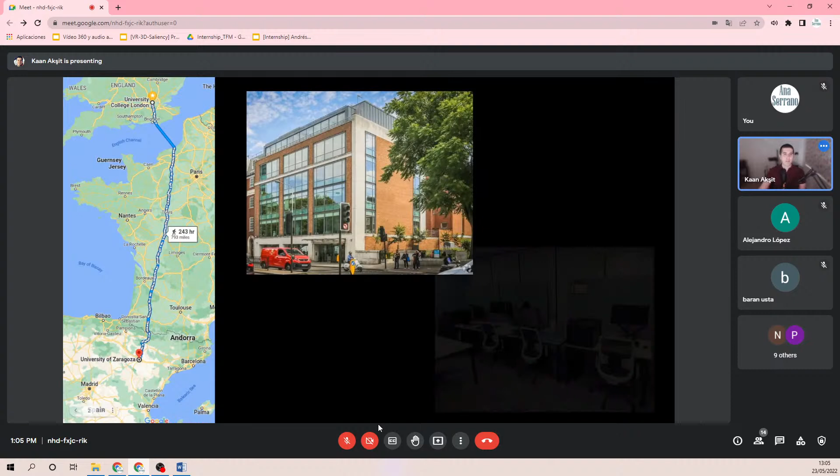As you arrive in London, one of the main train stations, Euston train station in London, you will immediately find our building. It's right across the street. It's a beautiful building located in the center of London. In this building, you'll find lots of offices and various different laboratories. Both my office and my laboratory are located in the very same building. Here you see a photograph taken some time ago showing benches from my laboratory. We are equipped to conduct research in various different branches, including optics, graphics, and visual perception.

Next, I would like to give you some idea about where I come from, what I do, what's my intention, what's my lab's motivation, and so on. Here I show a timeline. I joined University College London back in 2021, a year ago, in the computer science department as an associate professor. I started my own research group, Computational Light Laboratory.

Previously, I was a senior research scientist at NVIDIA in the United States, where I helped co-found a research group dedicated to virtual and augmented reality applications. After spending years in the industry, I moved back to academia with one goal in mind: to help shape young minds and get their attention to tackling a critical problem, the future of displays. In a second, I will talk about why displays are so important, why we should care about displays in the first place, and why its research is highly important for our societies.

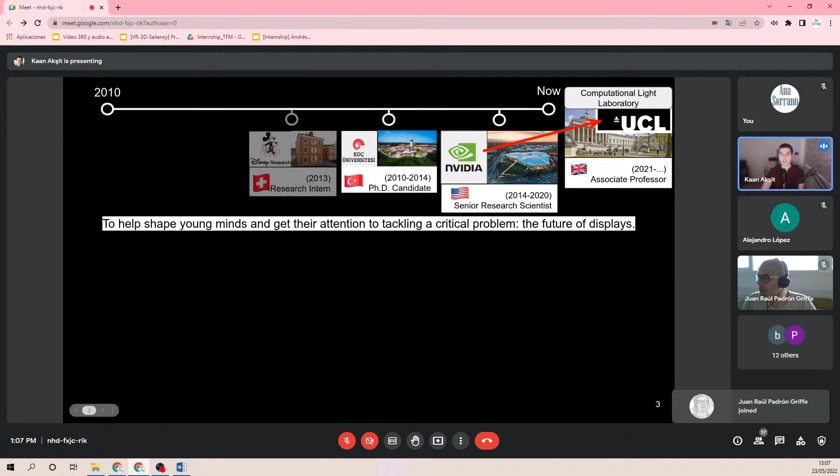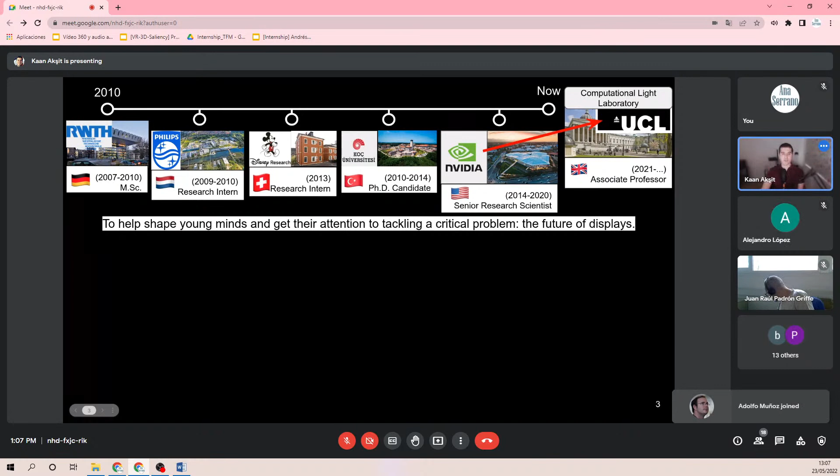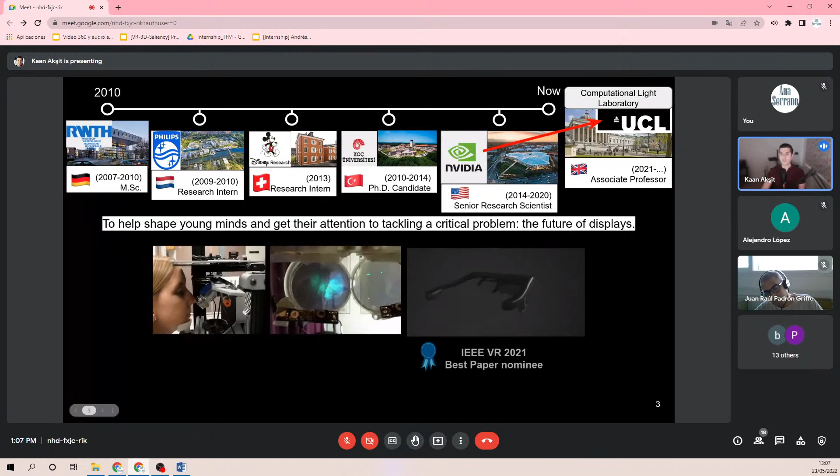But before coming to that, I would like to highlight that I've been in other places in the past. These institutions include Koç University in Turkey, Disney Research in Switzerland, Philips Research in the Netherlands, and RWTH Aachen University in Germany. So people know me primarily for my contributions in augmented reality displays, near-eye displays, and 3D displays. Many of these works, as Ana told, already received multiple awards.

Next, I want to bring you a slide discussing more about our most noticeable research from recent years. A quick summary goes as follows. On the left-hand side, you see a film being placed in front of a mobile phone and converting that mobile phone into a near-eye light field display. We made such a prototype back in 2015, and we showed that you can convert a mobile phone this way into a display just using a very thin sheet of film.

In 2017, much before the leading industries, we looked into a more advanced version of that light field approach by taking into account perception. We looked into the idea of varifocal displays. Assume you know where the person is looking at in a given scene. You can change the focus of the display to a specific location in the scene, so that you present the right focus cues in a display. This is computationally less expensive, and that's why it's interesting, because it simplifies your hardware quite a lot. Although in these implementations they have bulky form factors, it could also be shrunk down. There is evidence for these things, which you can find coming out of industry research labs in recent years.

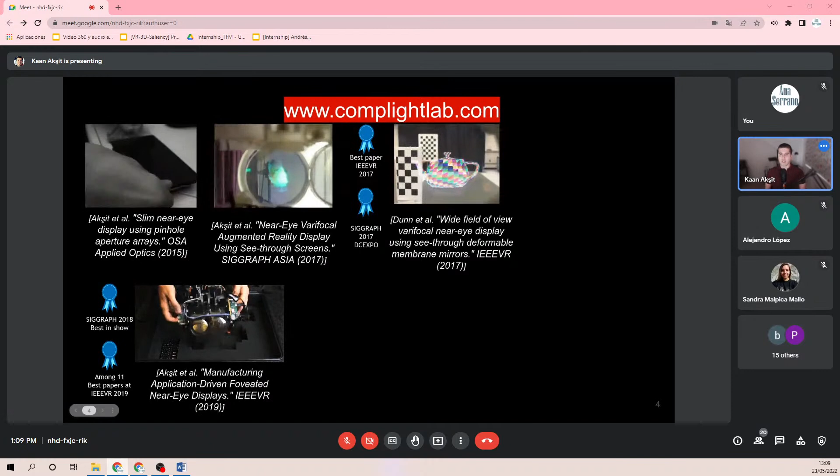In 2019, we looked into the trend of 3D fabrication and 3D printers. We asked ourselves, can we make this so easy that you can just 3D print your display using your own 3D printer? This was the basic idea, because 3D printers promise an approach of updating everything on the fly. All you need is the raw material and the 3D printer. We showed that most components in a near-eye display could be 3D printed, so you can make a very cheap and highly effective near-eye display using 3D printers that supports your application.

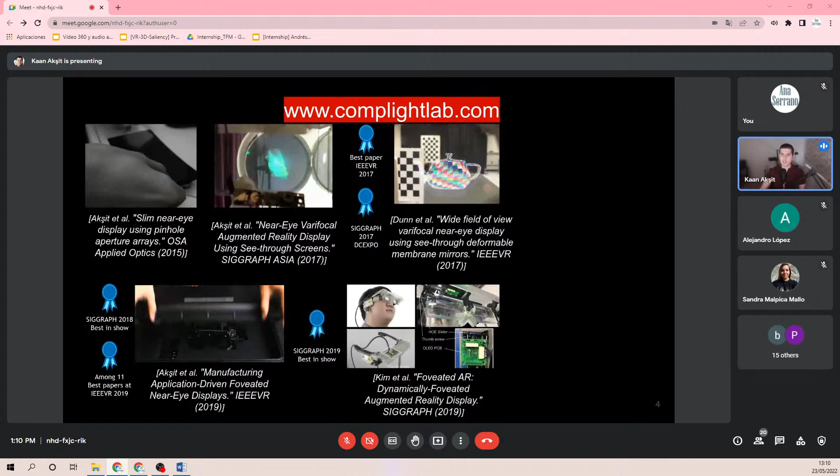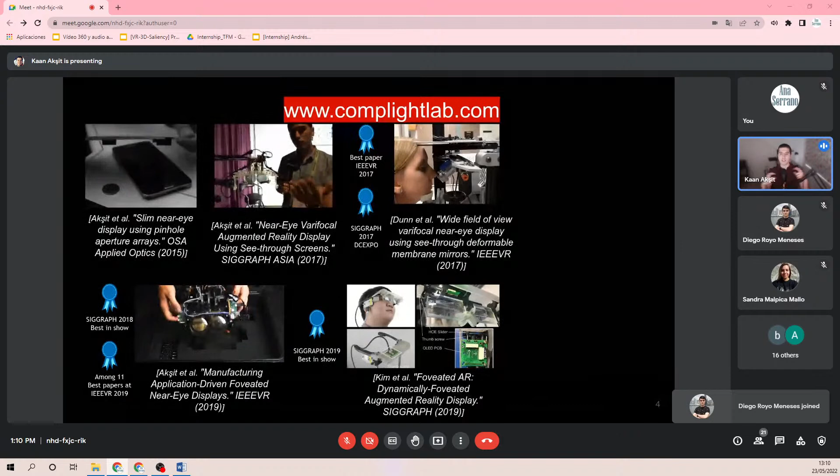Back in the 2018-2020 timeframe, we looked into foveated displays. The idea is, if I know where you're looking, I need to provide a high-resolution image at that location. However, in your peripheral vision, at large eccentricities, you don't perceive most of the details of the content. So can I use a lesser amount of pixels in your periphery? This is the basic idea behind foveated displays, and we actually built something similar: a picture-in-picture display with a high-resolution image at your gaze location, and a low-resolution image expanding to a wider field of view.

So today I want to focus on the future of display technology. This is the main motivation of my lab and a primary focus in my research group. The reason for that is quite obvious, but I just want to reiterate it.

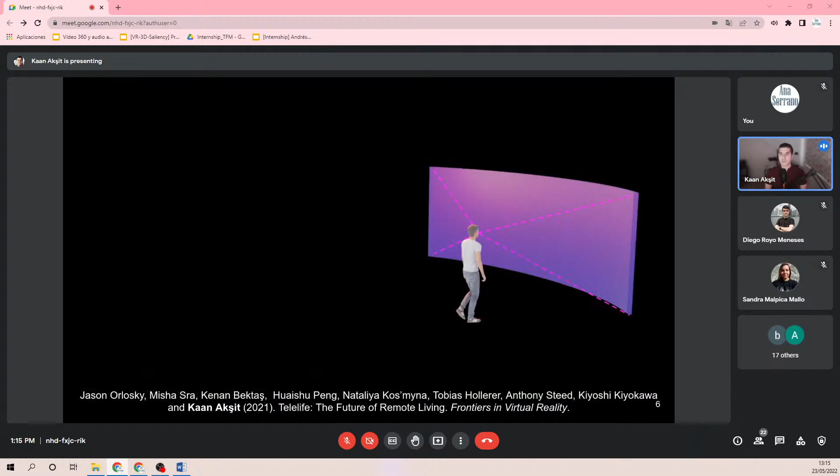Of course, this is subject to discussion - this is my personal view about how the future should look like. But I think many industries share a common goal. In my opinion, the primary goal of industry and academia is to build a display that paints lifelike three-dimensional visuals right in front of our visual field of view.

And these displays will be mobile, forgettable, let's say. You won't even feel it - it's like your smartwatch. You don't feel it all the time, but it's on your arm. You can forget about it. It will be similar to that in terms of experience.

And these future displays will help us transform the social interactions I was pitching earlier, help us get together again and remove us from flat teleconferences. And of course, it will provide unseen opportunities in education and entertainment, because now you can introduce three-dimensional visualizations in the proper, natural way, and blend it with the real world. That's also an important aspect of augmented reality.

Also, it can transform businesses and healthcare applications quite a lot in the future. But as you can see from this depiction, the person is standing up, not sitting down, not in front of a table, and not looking at a two-dimensional flat display. This is the future that I hope to get to, and it's more human-oriented.

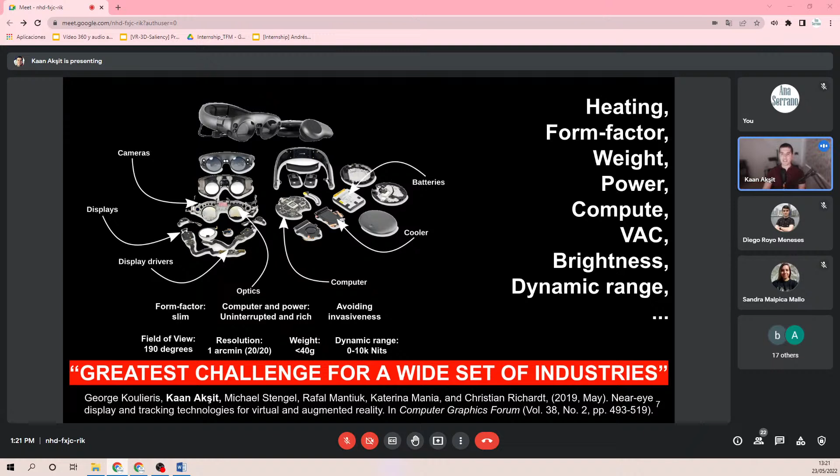We can either follow this route, continue pushing it and try to miniaturize display drivers, batteries, and computers while building a new operating system and finding a new camera and display and so on. Or we can change our thinking, change it in a different way. But how do we change our thinking in this? How do we get to a new form of design from here?

I asked the same question to myself some time ago, and I looked into augmented reality display devices. I analyzed them and tried to see what people tried in the past before. People tried near-eye displays, handheld displays, retinal displays. There are even contact lens displays you can find. There are projector-based spatial transparent screens, projecting on walls, and all these kinds of displays you can find. To my surprise, there is one thing that people didn't try.

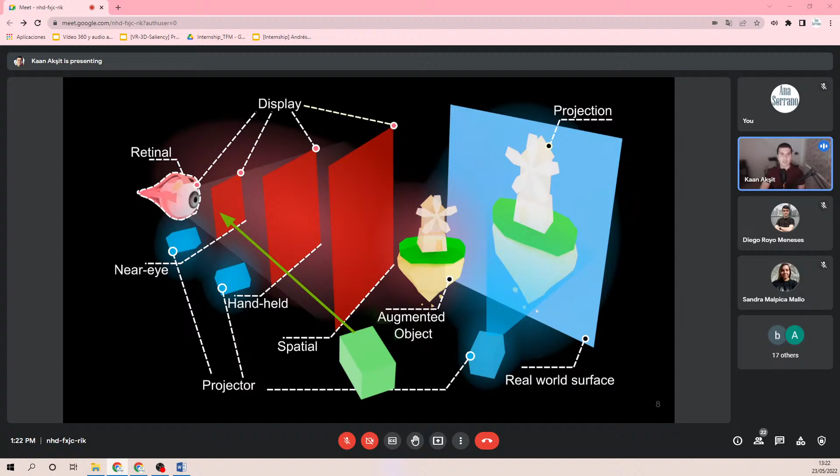That is to project images to a user from a distance without requiring a screen. It can either require an eyepiece, or it can be a direct beaming into the eye. So I will be talking about this idea mainly in this talk, and I'll combine it with computer-generated holography in the coming slides.

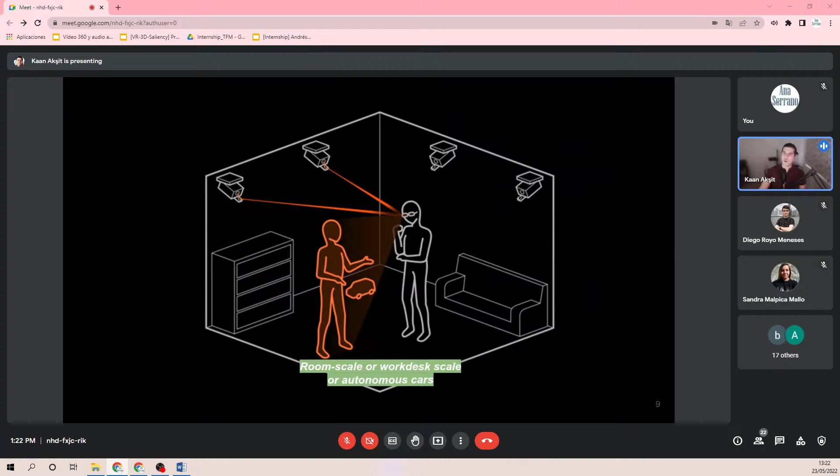So let's understand what I'm proposing here. If we take everything off that device, off that near-eye display - I'm talking about computing modules, light modulators, and batteries, all these devices - let's say we remove all of these from the near-eye displays. Instead, we pack it into projectors that you can distribute around. It can be in any form factor, you don't care, because you're not attaching these projectors to your head anymore.

And then we beam optical beams to a user from a distance, creating this augmentation overlaid on the visual field of view. Of course, in this scenario, a user has to wear some sort of optical component, and at best, these components can be diffractive components that are fairly thin, can be in micrometers thin scale.

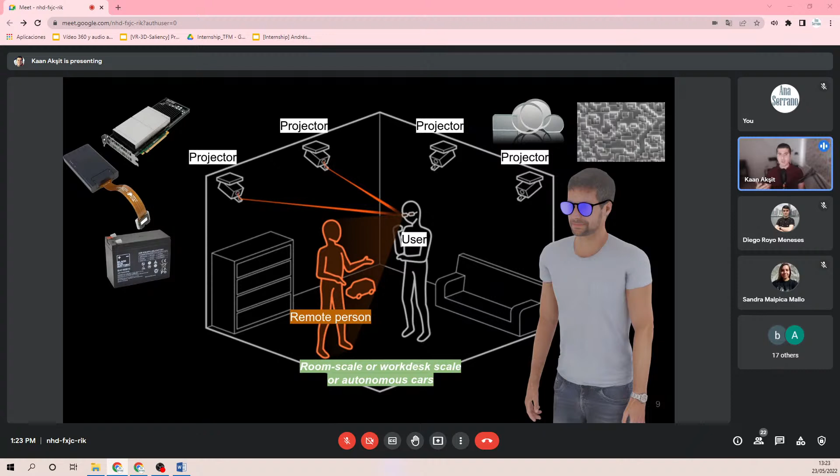So basically, you can create glasses that are lightweight, even more lightweight than your prescription glasses, because they're just made out of diffractive components. This way, I think we can avoid many different problems, like we don't have to think about heat dissipation, or form factor, because all I'm using is a diffractive component in front of my eye, and the weight is like there's no weight in this. The power and compute can all be on the projector side.

If you like, you can add, I don't know, 2 different computers per projector, as much as you want. So this can help you realize an augmented reality display system that will be free from multiple different problems that we just discussed. About the heating problem specifically, I want to talk about this a little bit more.

If I just take my mobile phone and put it here, let's say, and it's in constant contact, and let's say I'm talking to someone on the phone. After 10 minutes, it can easily get to a temperature like 35 degrees, 40 degrees Celsius. And this is a high temperature. If you look into the medical literature, even this is not healthy.

So just think about the requirements of augmented reality glasses. If I place some sort of computer, even if it's a thin client, people using this streaming approach and so on - even if they stream, they would need some sort of predictive capabilities on those glasses, because the latency will be an issue. People have to predict the missing frames on the thin client and so on.

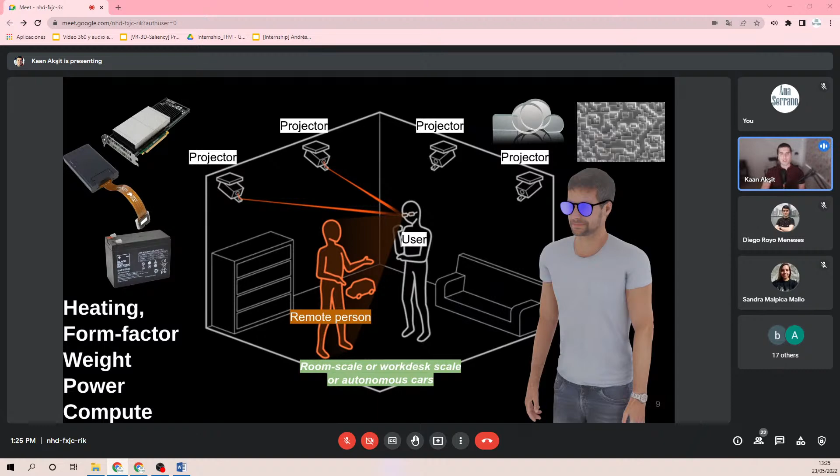I'm not really sure, I'm not fully buying all these other approaches. I'm not against them, it should be explored, somebody has to explore it. But all I'm saying is there's an alternative way to fixing these issues. After designing this thing, we literally go back to the lab and start building stuff.

Back in 2021, we built a display for the first demonstrator for this work. On the left-hand side, you'll see this optical breadboard with a bunch of different components. You see this projector projecting a beam through a bunch of different lenses, and then these lenses project the beam to the steering mirror, which helps you shoot the beam in the right direction towards the user.

On the right-hand side, you see this wearable headset, the first version. There's a mirror, diffusive screen, and a beam combiner. You don't necessarily need that mirror on top, because if you have your projector at the ceiling, it can project from the top and you don't need that mirror anymore. This is just needed because the projector at the time was on a table and the person was close to the projector, so something has to bounce the beam into the display in the correct way. That's why we needed that thing at the time.

If you make all these things happen, there's tracking also involved. This camera, if you look at the left-hand side again on this optical breadboard, you will see this camera. It's coaxial, meaning it's aligned with the axis of beam propagation. You can now see wherever you project the beam, so you can speculate if you're hitting the glasses, or a wall, or something else with your beam. You can shine the beam at the right place, find the person, and display the image this way.

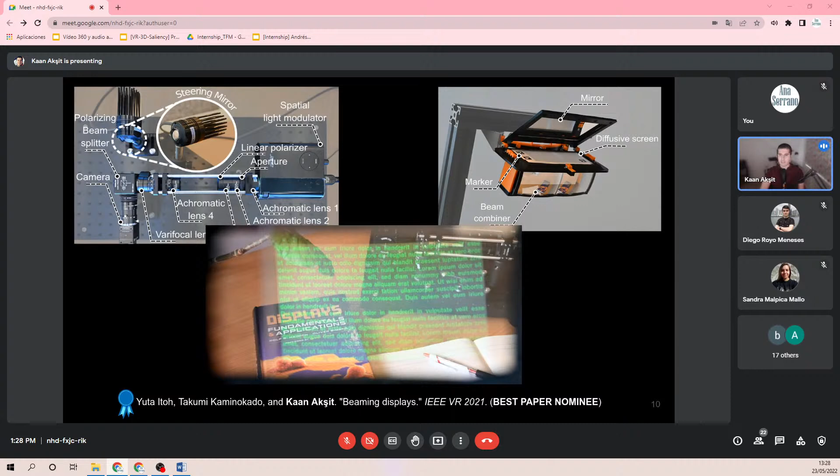I'd like to take a quick segue. Please keep this in your mind, what I just showed you here. I would like to take a quick segue to holography and combine those two things in the next slides.

In recent years, if you're following SIGGRAPH, Optica, Nature, Science Advances, and other places, you'll start to see a pattern: people are building holographic displays, relying on them, and building new types of holographic algorithms and so on. There were seminal papers, specifically from Andrew Maimone back in 2017, which was revolutionary at the time because it offered a slim form factor holographic display in the form of glasses. We waited until 2020, and then we start to see this happening in SIGGRAPH again, and currently this is an ongoing trend.

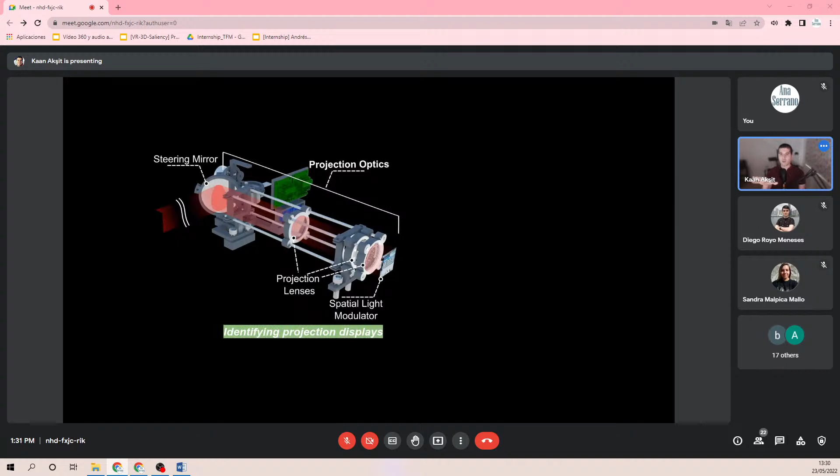So of course, in that case, you need to build a holographic projector, and that projector has to project images to a user from a distance. And then we should track the location of that user so that we know where to beam the holographic beams we are generating. And we should have a hologram generation pipeline, and then we should have some sort of simulation model that does everything perfectly on hardware.

Perhaps in the future, if you want to bring existing content to holography, we should also start thinking about how do we do that. What kind of models, what kind of camera models, what kind of representations we need to get this content from existing point clouds, multiplane images, or signed distance functions or whatsoever. How do we get them into holography?

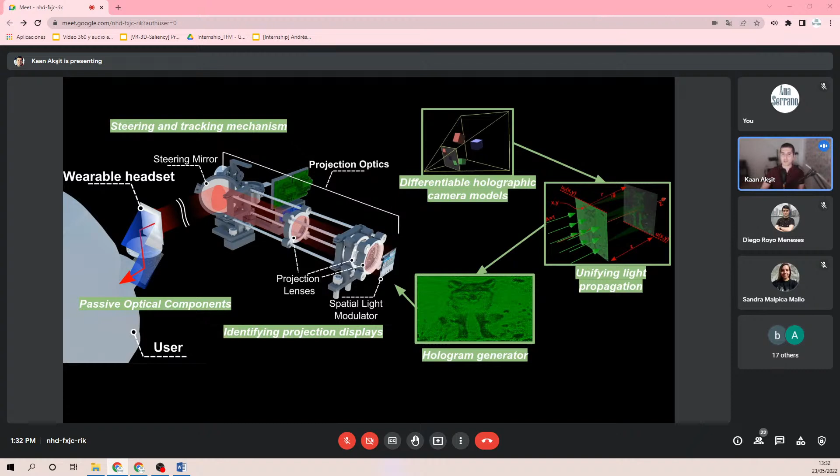How do we feed this data into holographic displays? A holographic display is like a NeRF, basically. It can show you different perspectives in real life. So it's how do we achieve all these qualities of holographic display in such a display? This is an open research question, right?

And we took a step further. We built a holographic display. On the left-hand side, you see an eyepiece that is 3.6 millimeters thick, and it's standing 50 centimeters away from that holographic display. As you can see, I'm just holding my hand and then measuring it. My hand is like 26, 25 centimeters long, so you can just have the measure like that in that way. So this 3.6 millimeter thickness is all you need in your glasses, plus it's below 20 grams.

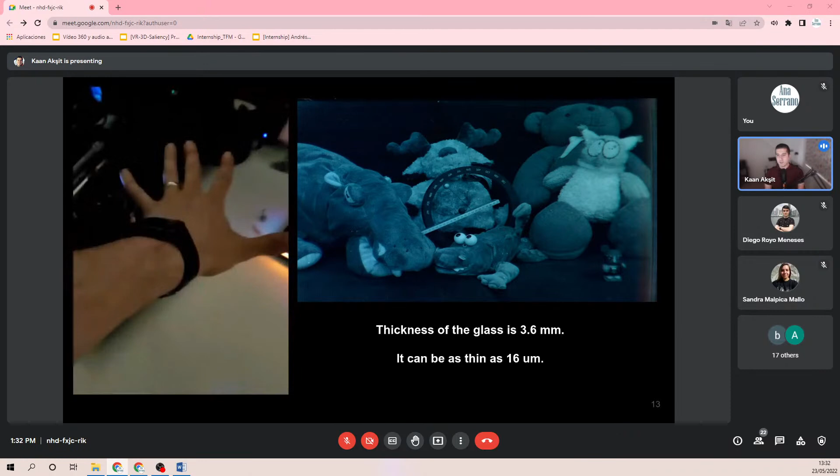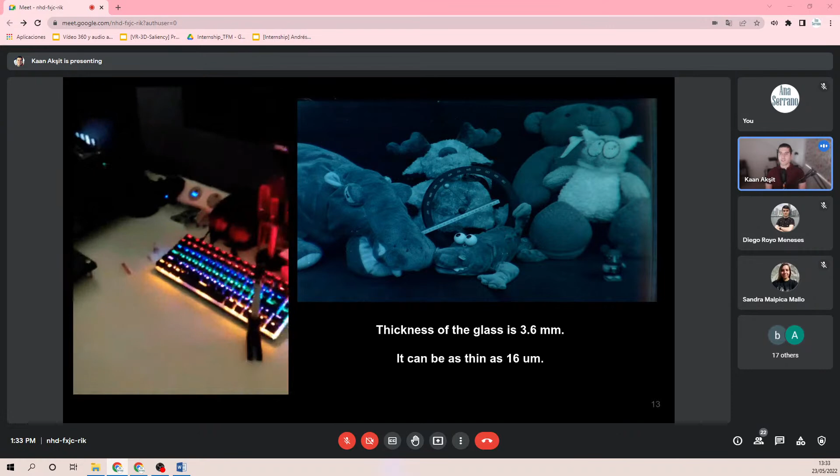You don't need batteries. You don't need computational units on this thing. You don't need anything on this thing, to be honest. It's just passive glasses. And the image quality you will achieve from that 50 centimeters is shown on the right-hand side, as you can see.

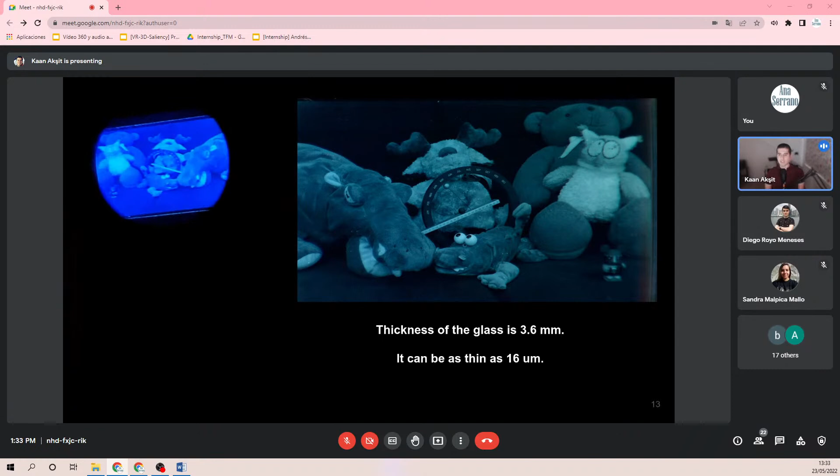We don't have the right eyepiece in place at the moment, but we are slowly getting there. And this can be as thin as 16 micrometers in thickness. Again, the scale is micrometers, whereas the previous stage was millimeters.

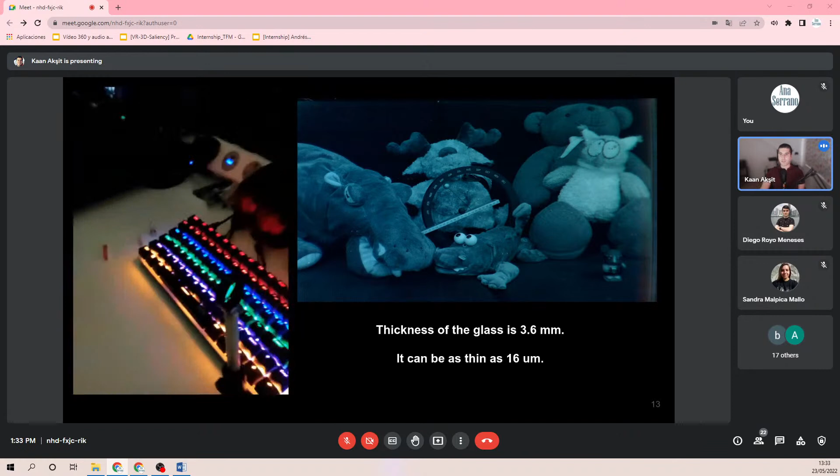So the next thing maybe we should talk about, for the curious people in the talk, they may want to understand a little bit more about how holography works and why they should be caring about holography beyond this research that I'm pitching here. The basic idea of holography is there's a hologram.

It can either manipulate amplitude or phase or both. Amplitude is like the amplitude of light, and phase of the light, phase of the electric field. So in a hologram, each point diffracts, and then it arrives at some image plane. As it diffracts and arrives at the image plane, other points on the hologram are also doing the same thing. And sometimes these beams come on top of each other, superimposing on each other. They can either cancel each other or amplify each other. It can be constructive or destructive interference.

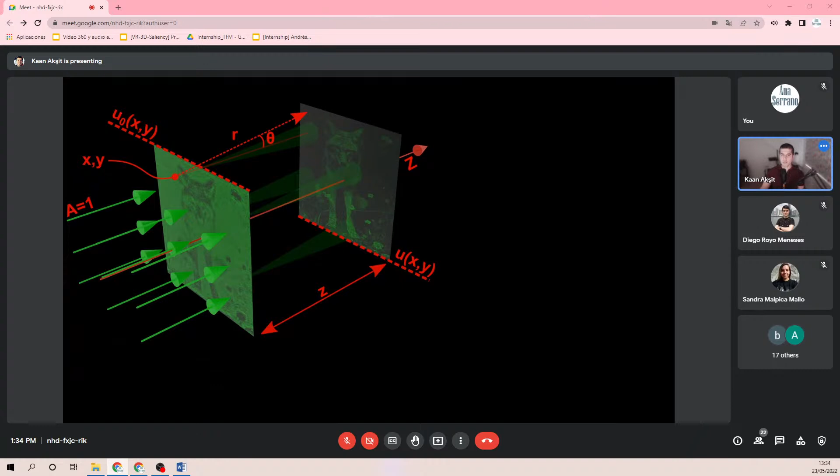This is the quality that holography offers with respect to existing displays. And obviously, this display can offer a high resolution image because this interference can give you even tiny features on your image if you want your hologram to generate it. Thanks to interference and diffraction, you can do this.

And plus, since you can cancel out beams, you can really remove light from the scene. I mean, maybe it's a bold statement, removing light, but removing amplitude, let's say, from the target scene. So you can achieve true dynamic range. That is also another big promise of holography.

Also, another promise is you typically use laser light sources in these displays, and these laser light sources are pure in color. So it can give you, if you choose your color primaries in the correct way, a large color gamut, which is not possible with the existing displays.

And it is the only technology that I know without any trade-offs. It can display 2D visuals or 3D visuals at the same time on demand. Whenever you like, you can just switch to 2D if you like. Whenever you like, you can get a 3D image out of this thing.

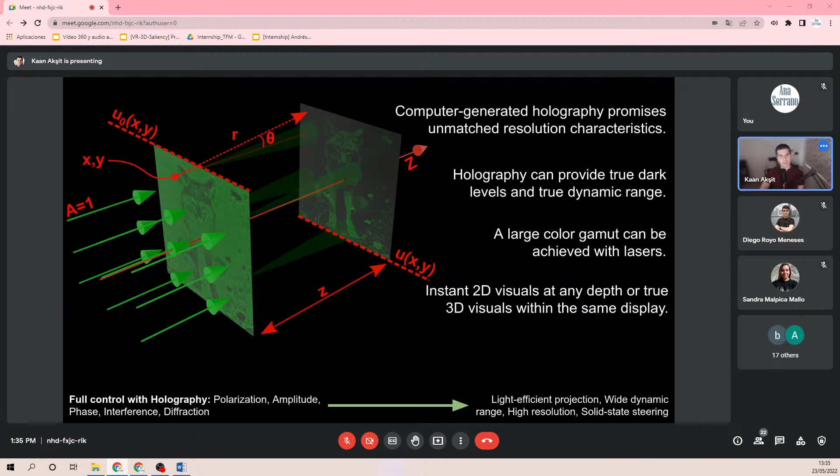And since the final image shown in this figure is a combination of multiple pixels shining on the image plane, even if one of your pixels is dead, it's not a big problem because the other pixels can compensate for it. A dead pixel is an ancient relic in this case.

Another thing is images generated in holography are continuous because you're talking about real physical waves approaching an image plane. There's no pixelation. Pixelation is just your simulation, nothing more. You don't even need the pixels, you don't even need to describe it in the form of pixels if you want. There can be other means to simulate it.

So all these promises about holography are not yet fully, let's say, demonstrated. There are really important advances in this field, but the field has not demonstrated all the promises yet. We are looking forward to seeing one single display that has all the qualities we need, a realistic, perceptually realistic visual. That is an active research problem. That's why holography is an important venue to look at for graphics folks, optics folks, perception folks, and so on.

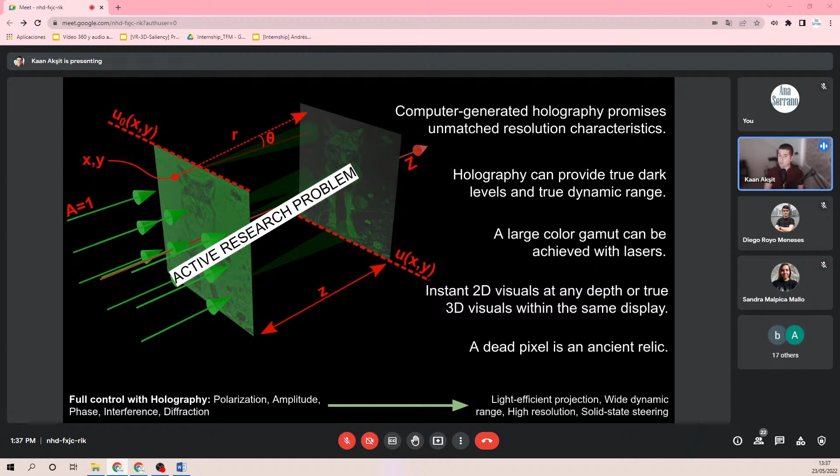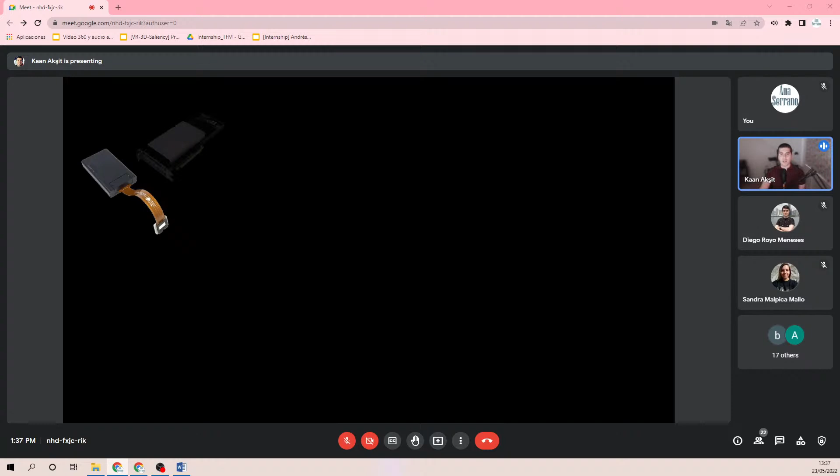So all these displays are becoming very common nowadays because spatial light modulators are maturing. There are more pixels on the spatial light modulators, so you can even buy a 4K phase-only modulator. It's a highly expensive device. And you have access nowadays to computational resources that are superior with respect to 10 years ago.

Highly parallelism is in place. You can have parallel processes running for you, helping you calculate faster in your hologram generation pipeline. There are even papers claiming real-time rendering for holography. With all this, holography again becomes an important venue and people are looking into it.

In the meantime, we developed a library to make our lives easier, and we share it with the public so that other people's lives can be easier if they have a desire to look into holographic displays or holography in general. The idea behind this library is it's compatible with modern machine learning frameworks, specifically PyTorch, and can automatically differentiate given models.

So it eases the pain of a person, or let's say a graduate student or an expert, when they want to use machine learning in their approaches, and they want to have a physical simulation in place for data generation, training purposes, or test time, and so on. They can do that with our library. I highly recommend it for people interested in this field.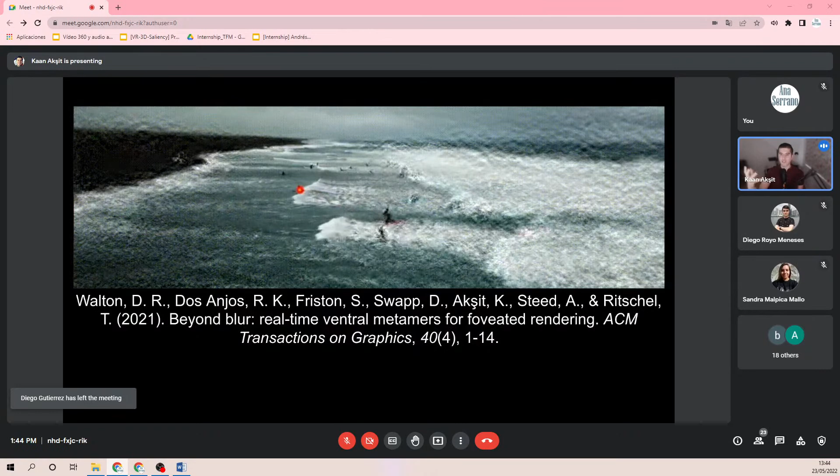We looked into this and we found a way to simplify this further, and this was a work published at SIGGRAPH 2021. The idea is to foveate using metamers. Here in this animation, you can see that this little red dot is your gaze location, and you're looking into different portions of the scene, following this red dot. Here you can see this - it looks like an icy glass - at the peripheral portion. Hopefully you can see this, and hopefully the compression is not ruining the experience for you. So the idea is you won't be perceiving this weirdness on the peripheral, because it is gaze contingent, described in a way that is statistically correct.

So we also add this as a loss function to our library in recent years, and we build a new computer-generated holography pipeline with it. We ask ourselves, instead of representing all the multiplanes at once for a 3D display, can we just look into one plane where the person is looking, calculate the visuals for that plane in the way it should look, and then rely on this metamerization process in foveated rendering - since this is a gaze contingent display - to represent the images in the correct way that your visual system would accept.

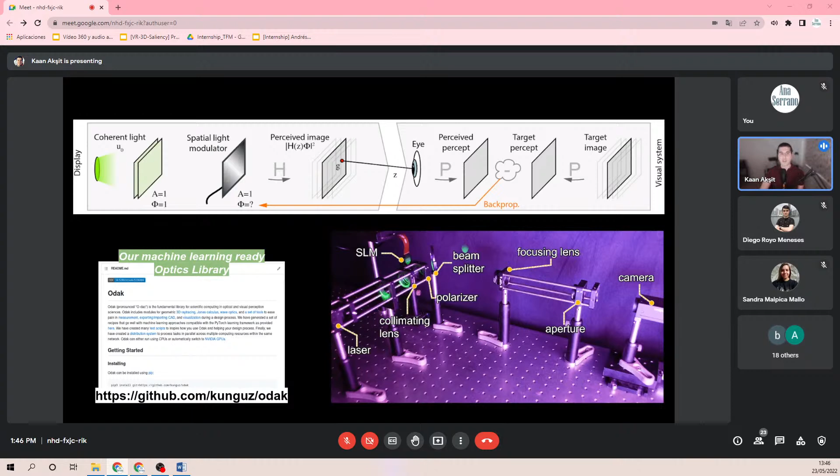We also build a holographic display to test this idea. So we test this idea with a holographic display that we built in-house, and we generated these visuals with it. On the left-hand side, there's a red dot representing the fovea location - the gaze location of a person looking at the first journal in the front focus. And there's this back focus, there's this blue dot as well. You can see different portions of the scene appearing differently due to the metamerization process.

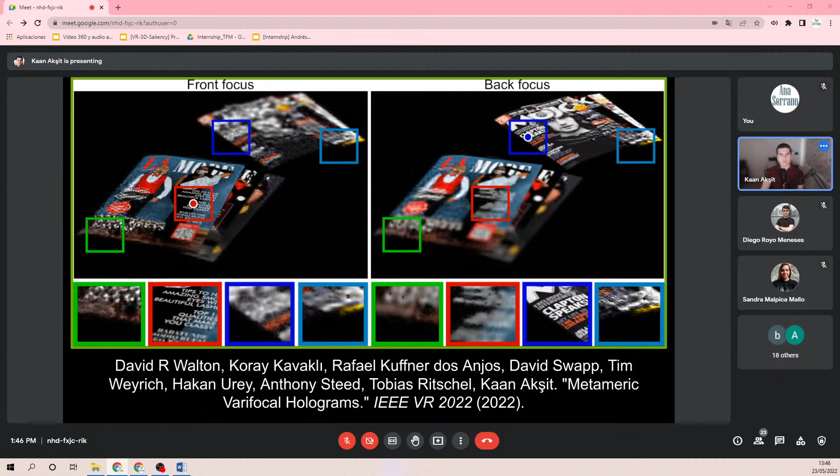Cool. The next thing is the conclusion slide.

If you're interested in hearing more about our work, if you have any questions, if you want to explore us a little bit more, these are the two websites that you may want to visit. But I can also give you a quick summary of what we have just talked about.

I argued that displays are essential to our lives, and it's becoming more and more important, and we have to improve them to improve our lives. And I argued, and many industrial and academic researchers would agree, that augmented reality near-eye displays could be the game changer for our next user interfaces.

I also argued that most of the components we use in these displays may not be necessary for applications like automotive, or working in front of a table, working in one room, or sharing one common space like a meeting room, and so on. In those kinds of applications, you can have this other approach that I pitched in my talk.

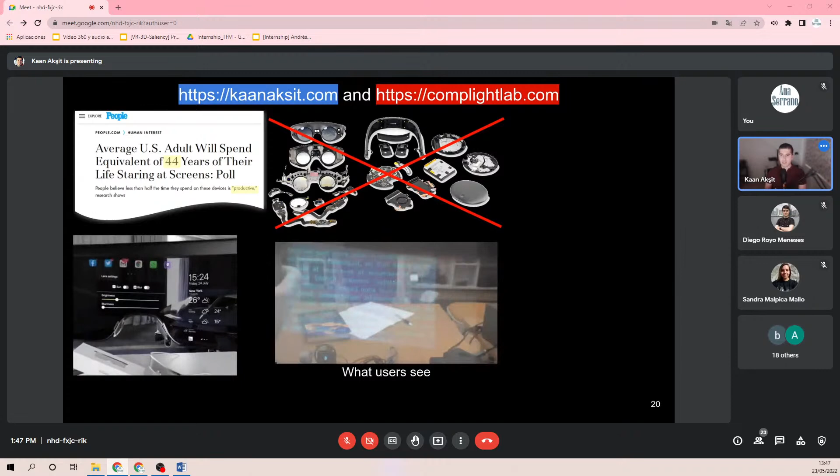And I also coupled this with the perceptual aspects, like how you can generate these visuals in a perceptually accurate way. With that, I would like to conclude my talk, and I'm more than happy to answer your questions. Thank you.

Thank you. Thank you for the talk. It was a great talk. So before, while everyone warms up with the questions, maybe I will start.

I was wondering, because I haven't tried a state-of-the-art AR device for a long time, but one of the things that I felt was, as a user experience, a bit weak, was the entrance pupil issue. With traditional AR devices, you need to have it located very precisely relative to your eye, because when you're projecting light to the eye, the moment you project slightly off, you see basically nothing. So I was wondering, for the case you presented with holography, how far are we from a real scenario outside of the bench, in which you need accurate tracking so that the projection actually reaches the eye? So how far are we from real scenarios?

Short answer is very far. So the short and honest answer, let's say. I think you bring a really interesting point here, tracking accuracy. Because you're projecting a beam from a distance to a person, even if you make a tiny mistake, it will be amplified on their retina.

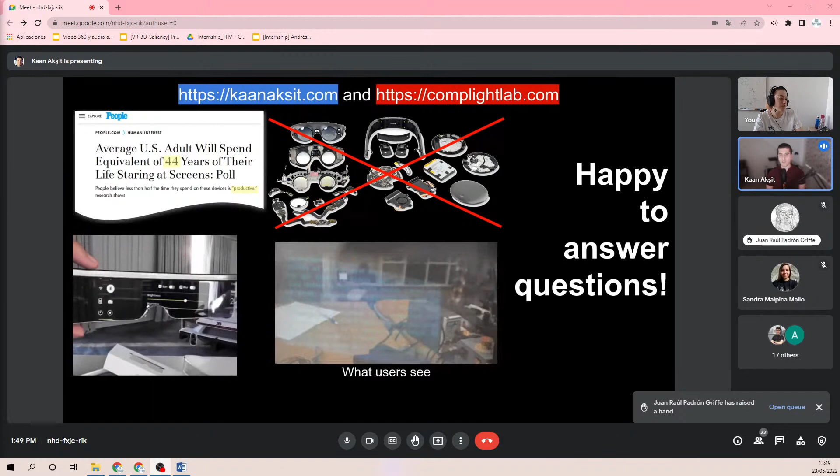That's very true, but there must be a ballpark, something that is acceptable, let's say. One line of research that could extend this work is tracking, as you just suggested—how accurate one can be, and what are the perceptual requirements for such a display to be practical. I think these are valid and highly important questions. Yeah, and probably perception also plays a role in this kind of question.

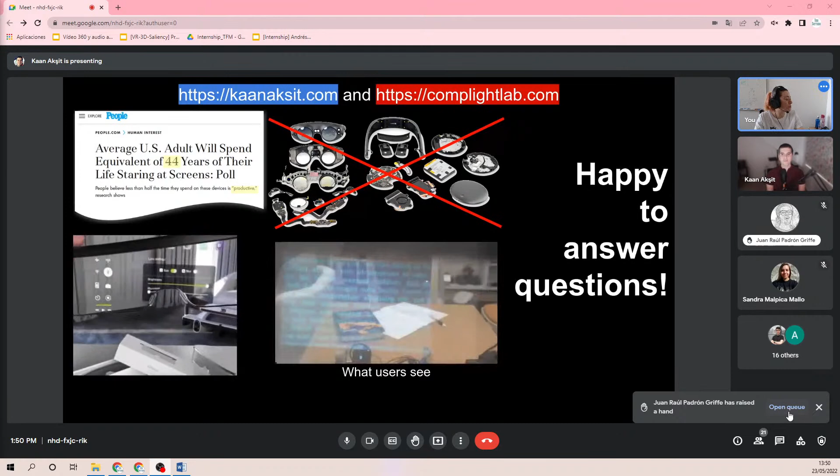Okay, thanks. So we have a question from, let me see the queue, Juan Raúl. Juan Raúl, please go ahead. Okay. Can you hear me?

Yes, I can. Okay, so I was wondering, when you talk about these holograms, you say like, okay, we can manipulate the light with these diffractions and so on. But what are the assumptions there? Because I guess if you have other lasers that are not your projector, I think it will be tough, no?

Sorry, maybe I can take the question one more time because I think I missed some bits. So the point of the holography is, okay, you have a projector and this projector emits the light, and you don't use a display, so you use this holographic figure. But how does this work—I guess you need to control the lighting condition of the place. But what happens when it's outdoors, or there is another light source in the scene?

Yeah, so I think this is a valid question. Let me see first if I understand your question. I think you're asking, there is light coming from the projector, and then if you take this outside, there are some other lights from the outside—would that cause any trouble? Do I capture that correctly? Yes, exactly. My question is if there is another light source in the scene, artificial or the sun, how will this affect the holographic experience? Yeah, that's an excellent question.

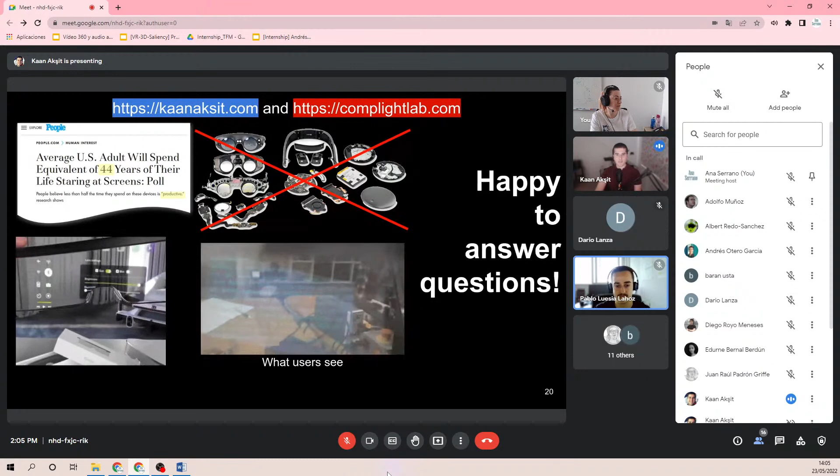Thank you, yeah, thank you Juan Raúl for your nice question. I'd like to switch back to some other slides I showed you guys earlier. Just give me a second, please. Okay, this is the slide, I think.

The question you raised is about what happens if there's more light in the environment—my projector might be too dim, right, for shining the right amount of light into my retina. How do I resolve that problem? I want to talk about one of my previous works from 2017, this one specifically. Hopefully you can see my mouse cursor.

The idea behind that is it contains this holographic optical element I was pitching earlier. The idea behind holographic optical elements is you need a reference beam to generate the image you want, and they do this in a highly efficient manner, meaning these tiny little projectors on the side are bright enough to show an image even outdoors. We made it work on a very sunny day in California, showing the visuals under the sun.

I'm not saying we're beating the sun, but it's applicable to outdoor applications. The point I want to bring from that project to this one is, if you have the right optical element using the right reference beam, there's a chance you can do this very effectively no matter how far you're propagating your beam—even from a meter away, because this holographic optical element is designed to do this effectively. That's a short answer to the brightness question, but I'm not sure if it satisfies you.